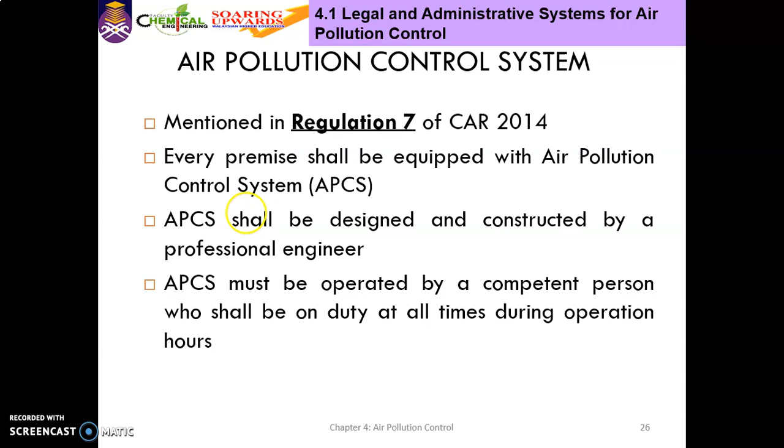So who is the competent person in operating air pollution control equipment? So the competent person must do this task to ensure the air pollution control equipment function appropriately, and also to get an early detection of any possible failures. So they must attend certain courses. Okay, these are example of the courses that is conducted by EiMAS.

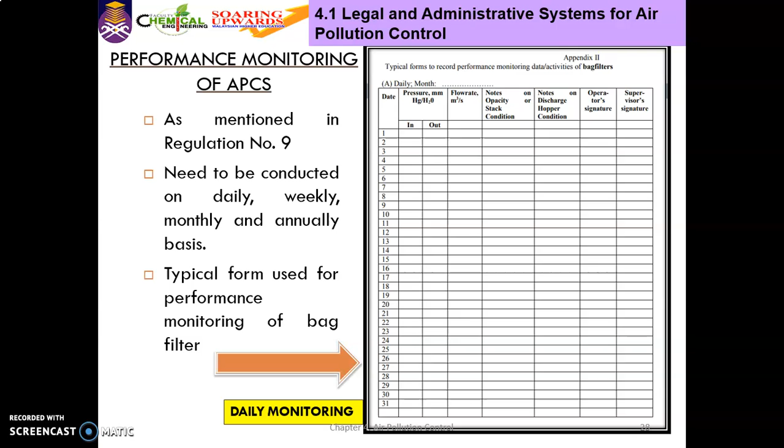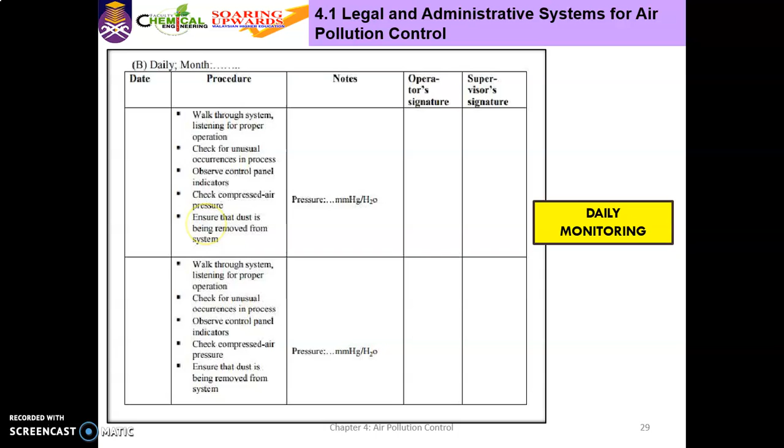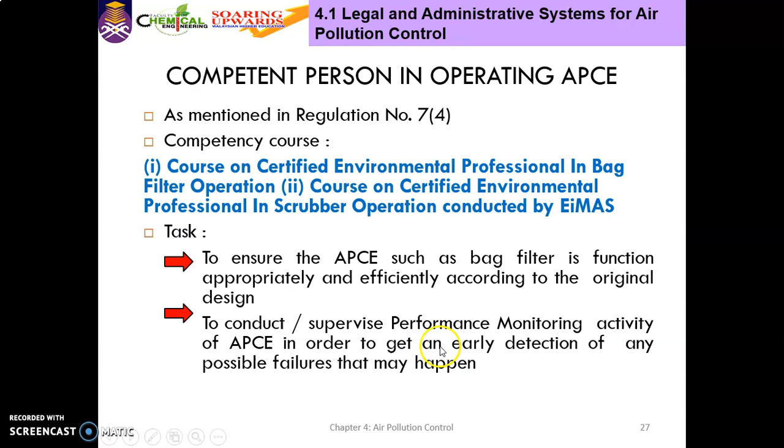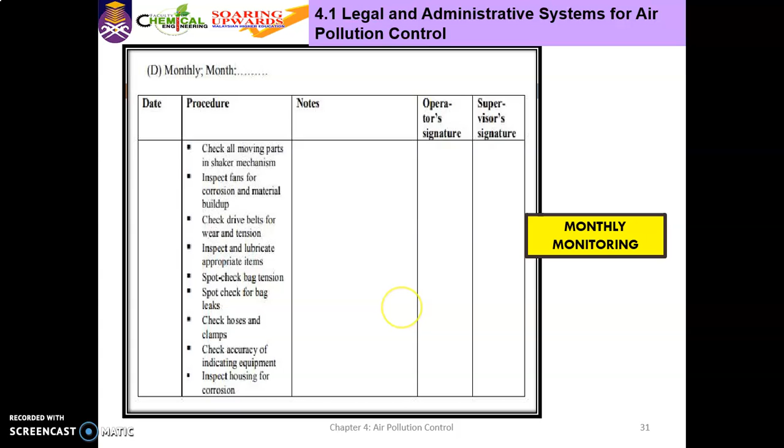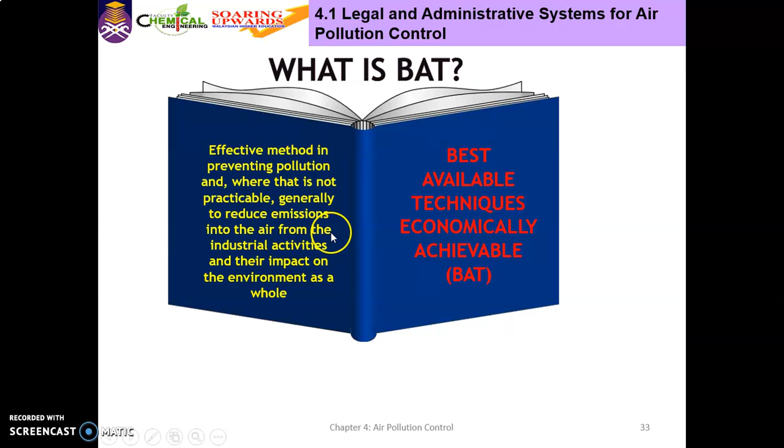Okay, next, what is best available techniques? So this is an effective method in order to prevent any pollution so that their impact to environment can be reduced. So this is actually under the first schedule in Clean Air Regulation 2014. There are certain industry and activities that are subjected to best available techniques.

Okay, so in order to achieve best available techniques, it needs to be designed and also operating characteristic of the plant or latest process, the selection of the raw materials or fuel, the implementation of 3R concept, a proper handling and monitoring, the efficient and continuous maintenance, and also reasonable economic and cost factors. So all these factors can achieve best available techniques, okay, in order to prevent and reduce pollution.

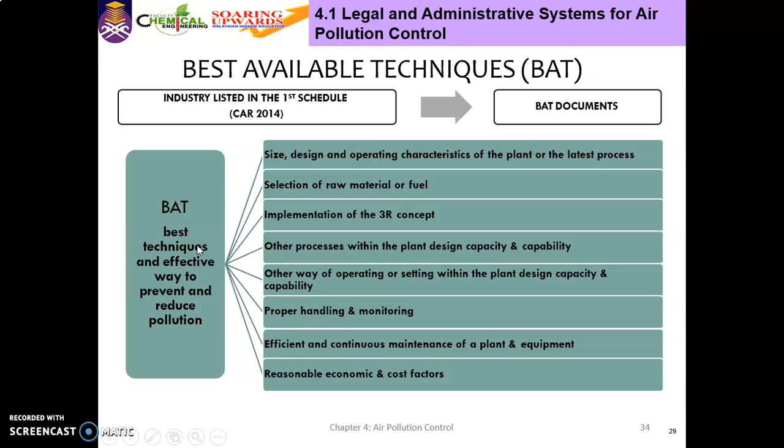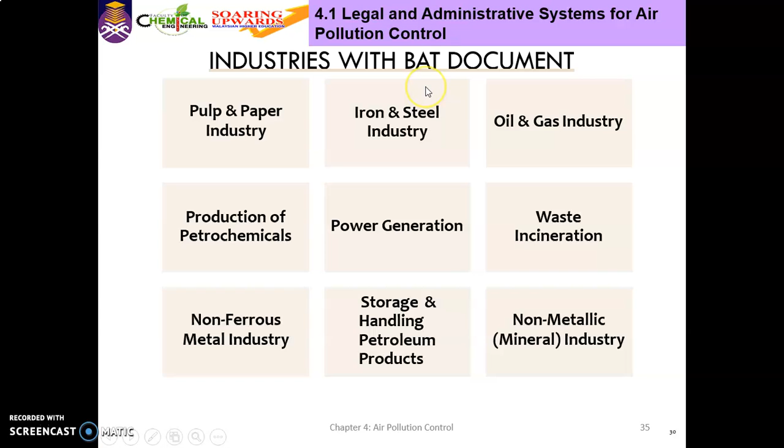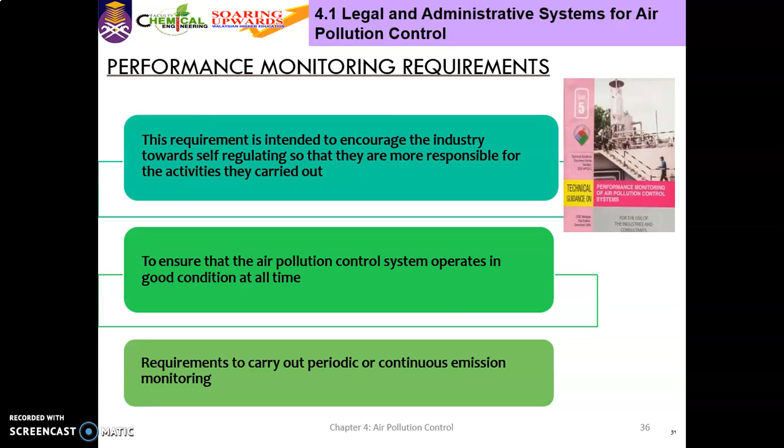So in monitoring, the maintenance requirement is to promote a continuous maintenance culture within industry and also to increase compliance. So the maintenance of air pollution control system and stack sampling are being conducted by a competent person, again a competent person.

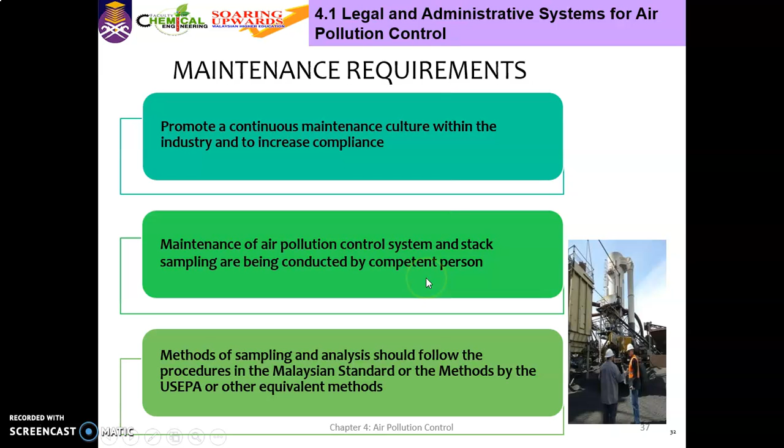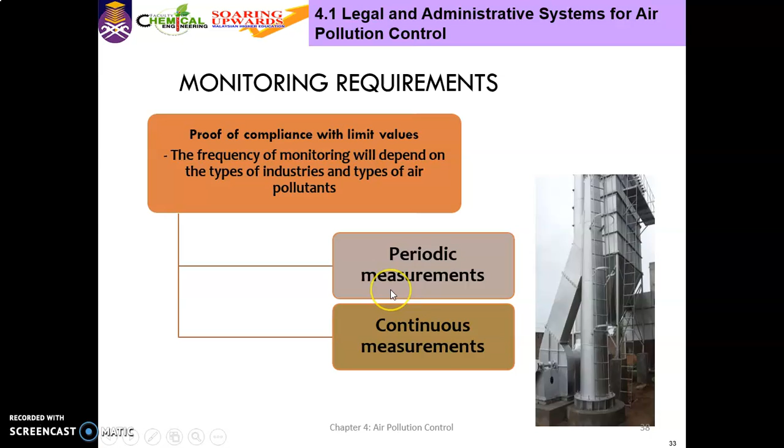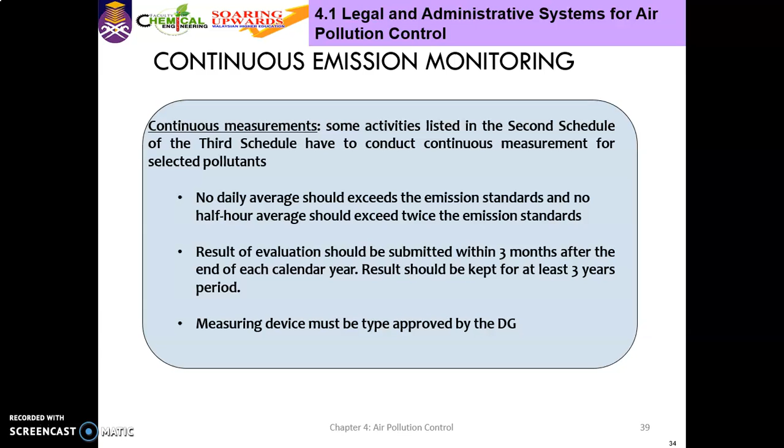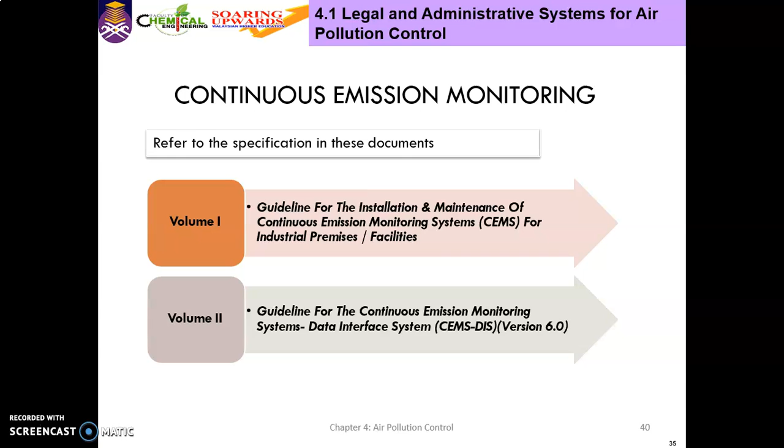So the monitoring requirements, whether in periodic measurement or continuous measurement. So for continuous measurement, no daily average should exceed the emission standard, and the results of evaluation should be submitted within 3 months for continuous emission, and the measuring device must be type approved by the Director General. And then for continuous emission monitoring, you have to refer to the specification in these documents, volume 1 and 2.

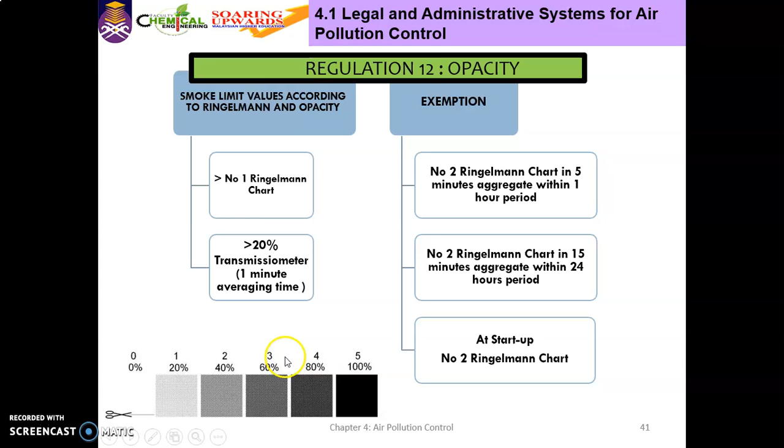And next, for regulation number 12, the opacity. Okay, so certain percentage refer to certain opacity. Okay, that is for first schedule. So next, look at the second and third schedule.

For second schedule, it involves the limit values and technical standard for general. So example, for heat and power generation, the production and processing of ferrous metal, chemical and petrochemical industry. So these activities have certain limit values. So the limit values cannot be exceeded.

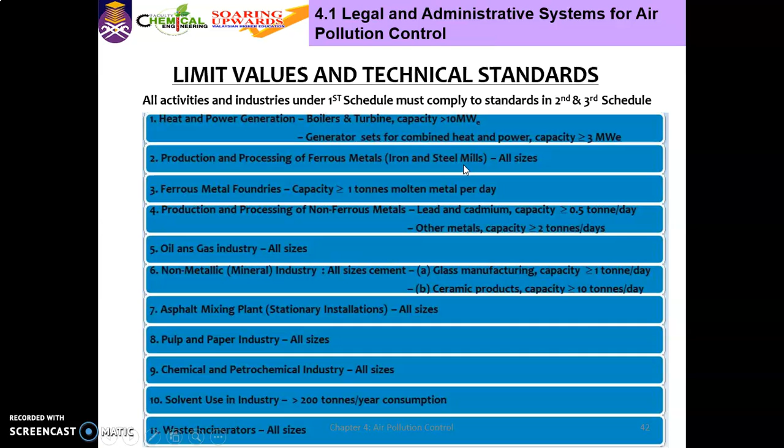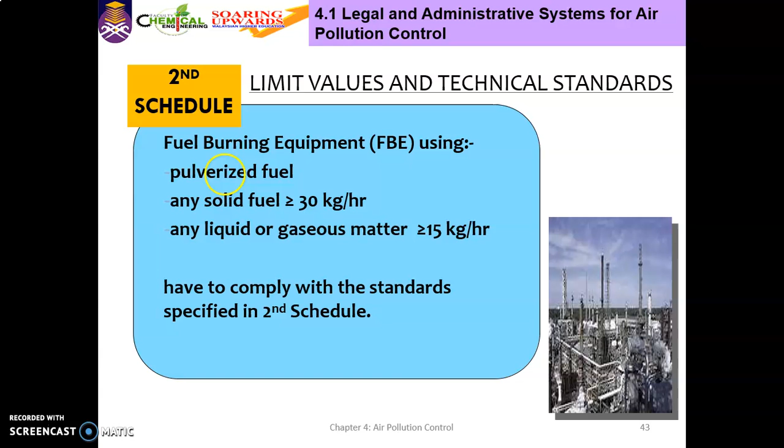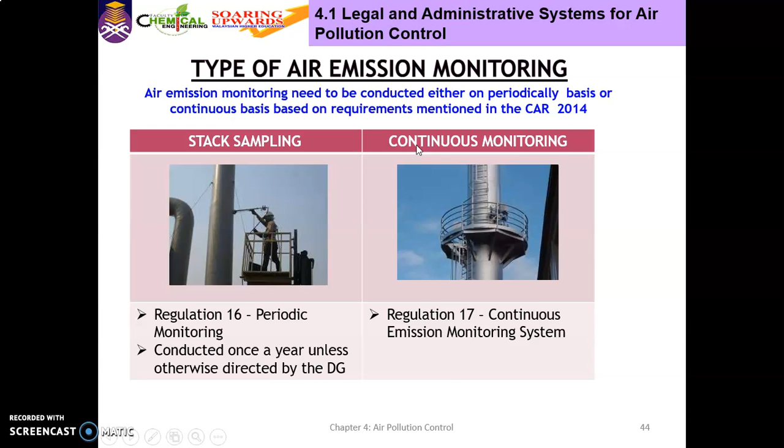Okay, so this is also under second schedule, fuel burning equipment. The type of air emission monitoring, it can be stack sampling and also continuous monitoring. Again, for second schedule, example of the limit value is for total particulate matter. So it cannot exceed 150 milligram per meter cube. So this is example for second schedule.

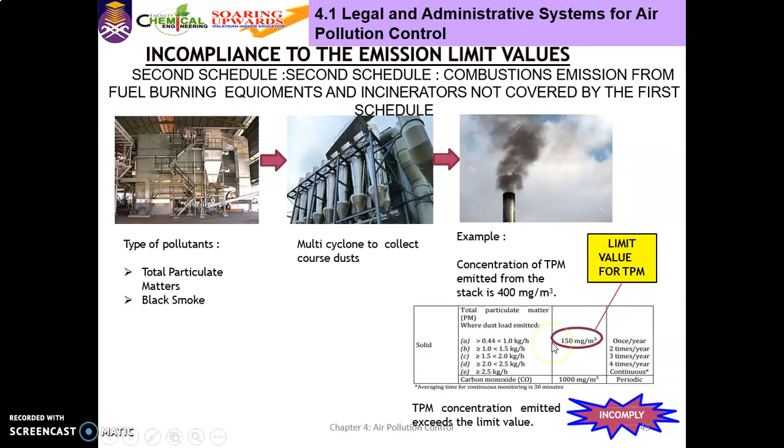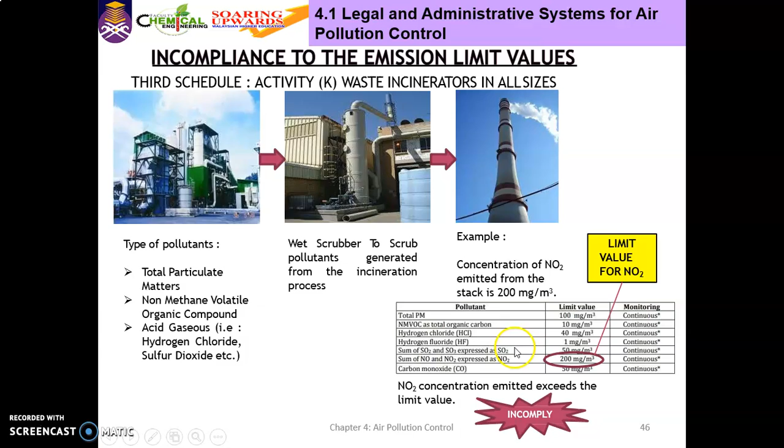For third schedule, these are some activities or industries that are subject to third schedule. Okay, so for third schedule, there are some pollutant and certain limit value. So these are type of pollutants, total particulate matter, acid gases, and some example of the equipment being used, and then example of the limit value for nitrogen dioxide, 200 milligram per meter cube. Okay, so these are some cases involved.

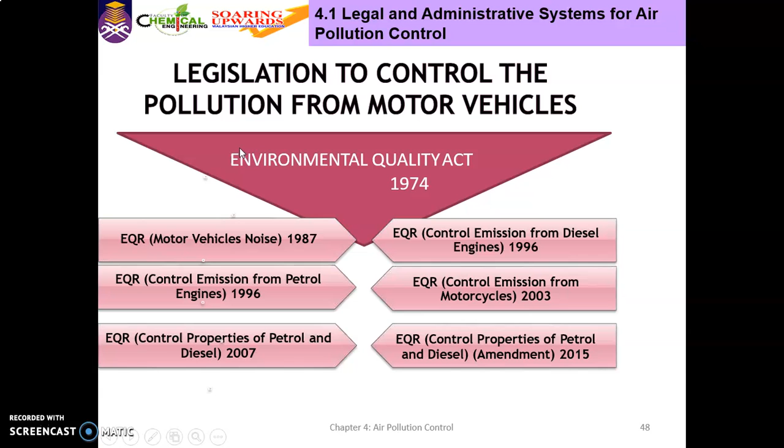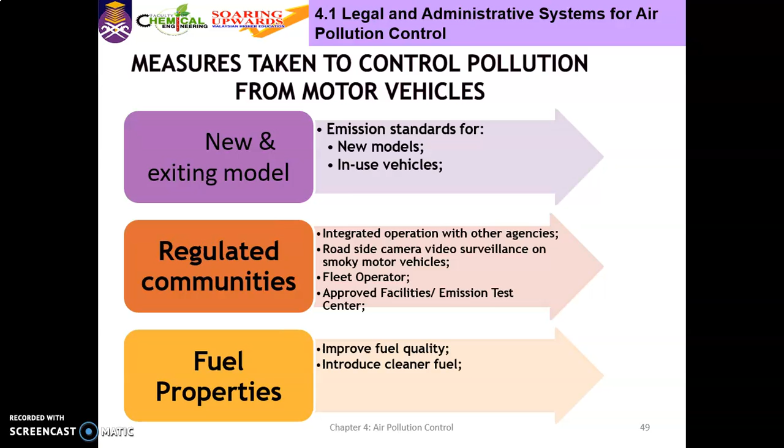Okay, so besides industries, the air pollution control also can be done for motor vehicles. So these are the regulation for motor vehicles under Environmental Quality Act 1974. The measures taken to control the pollution from motor vehicles, including the new and existing model, the regulated communities, and also involve fuel properties to improve fuel quality and also to introduce cleaner fuel. These are some cases involved for motor vehicle and some forms and supporting documents.

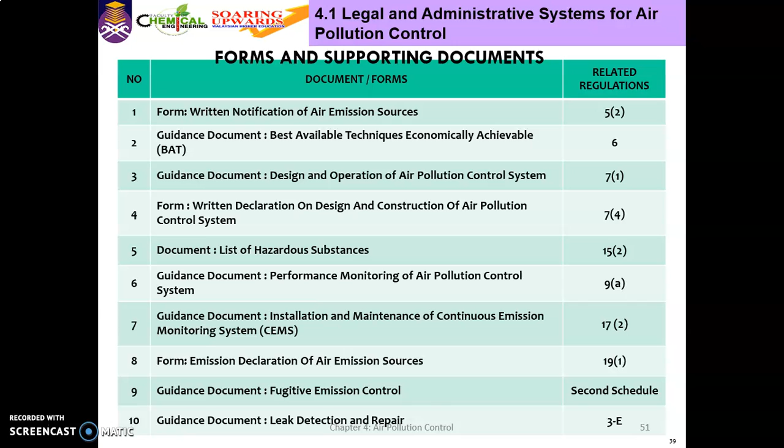Okay, so that's all for regulation.